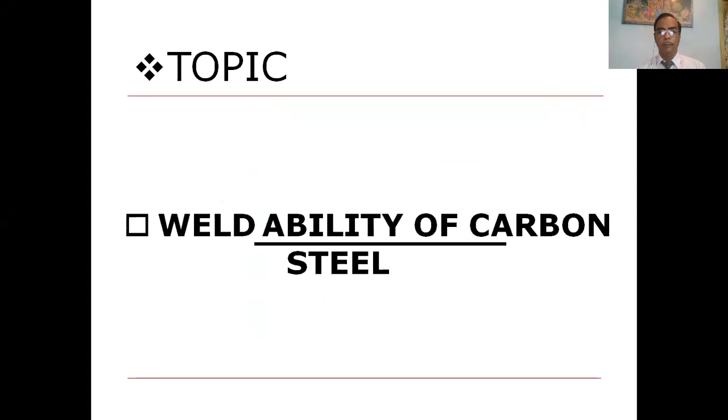The subject topic is Advanced Welding Technology, lecture number 24, Weldability of Carbon Steel. Today's topic is Weldability of Carbon Steel. Definition.

What is weldability? Two metallic parts of same or different metals mixed and fused when welded with or without applying pressure, with or without the use of filler metal, then the ease with which the metal joint will properly form by joining metal or metals is called weldability.

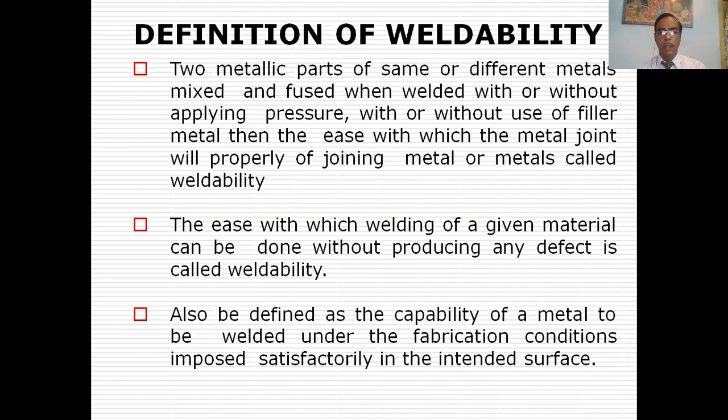The ease with which welding of a given material can be done without producing any defect is called weldability. It can also be defined as the capability of a metal to be welded under the fabrication conditions imposed, satisfactorily in the intended surface.

As per the American Welding Society, the definition of weldability is the capacity of a material to be welded under fabrication conditions imposed into a specific suitably designed structure and to perform satisfactorily in the intended service.

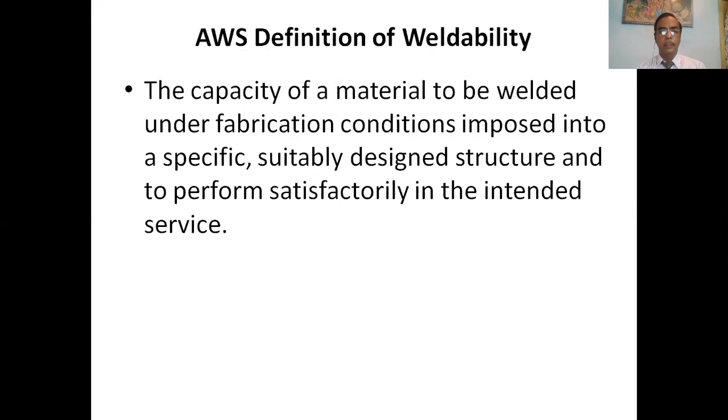This is the flux core arc welding, that is basically MIG welding. This is continuous welding being performed. Tubular electrode is there. This is a tubular electrode, and this is the electrode height, and this is arc being performed, arc and metal transfer, and this is weld puddle, and welding.

This is the welding metal, weld metal, and this is the direction, and this is the slag. Top of this slag, molten slag. This is a molten slag, and guide wire and contact tubes. This is the welding performance of a flux core arc welding.

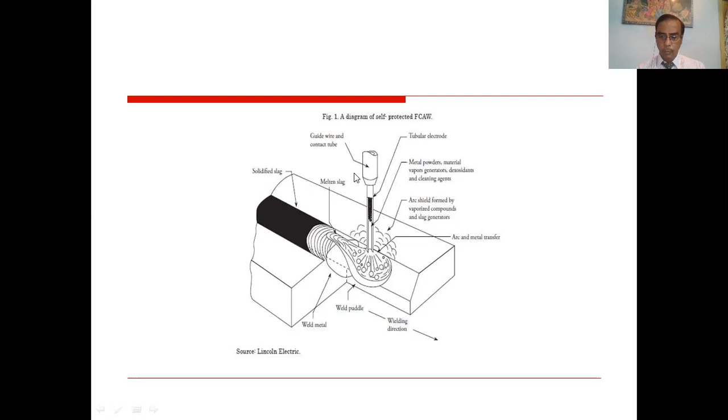The meaning of weldability: weldability is considered as the ease of accomplishing a satisfactory weld joint and can be determined from quality of the weld joint, effort and cost required for developing the weld joints. The efforts required for producing sound weld joints are determined by the properties of the metal system in consideration, namely melting point, thermal expansion, defects inherent in the base metal, and surface condition.

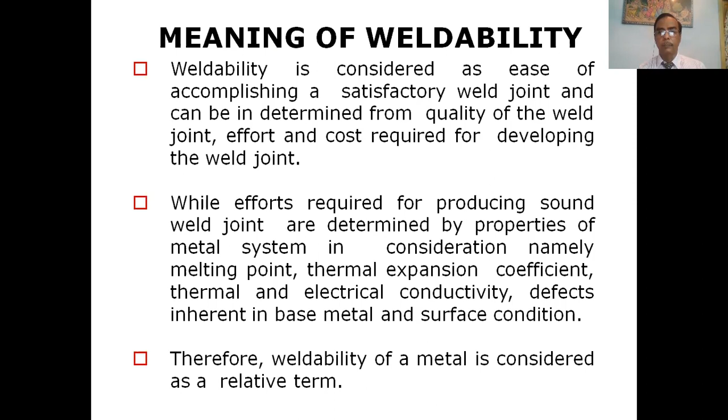Therefore, weldability of a metal is considered as a relative term. The metallic material with adequate weldability should fulfill requirements like contributing to good weld quality even with high dilution, having unchanged corrosion resistance after welding, and should not be embrittled when stress relieving.

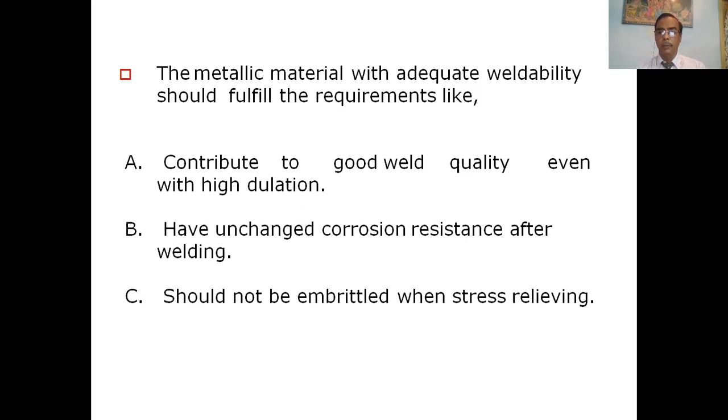This is the concept of weldability. Concept of weldability number one: metallurgical compatibility of a metal or alloy to be welded with any specific welding process. Metallurgical compatibility means that the base metal and weld metal can be combined with the degree of dilution encountered in a specific process without the production of deleterious constituents and phases.

Ability of the metal and alloy to be welded with mechanical soundness, and mechanical soundness must meet soundness requirements and normal engineering standards.

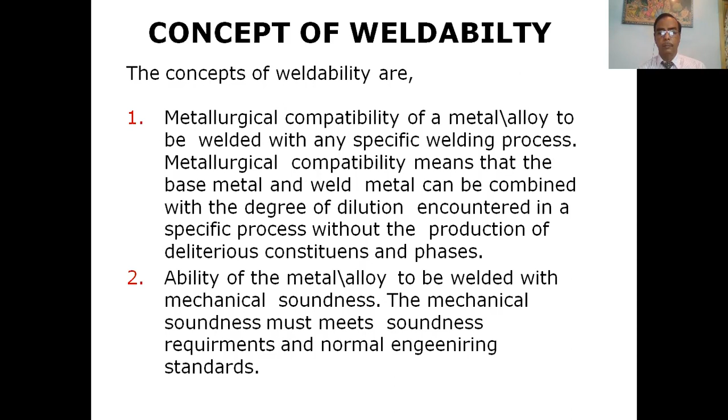Welding metallurgy and weldability: the topics of welding metallurgy and weldability are closely related to each other, since the weldability of the material is very much related to its microstructure. While the term welding metallurgy is universally accepted as a subset of physical metallurgy principles, the term weldability has been subject to a wide range of definitions and interpretation.

In its broadest context, weldability considers aspects of design, fabrication, fitness of service, and in some cases, repair.

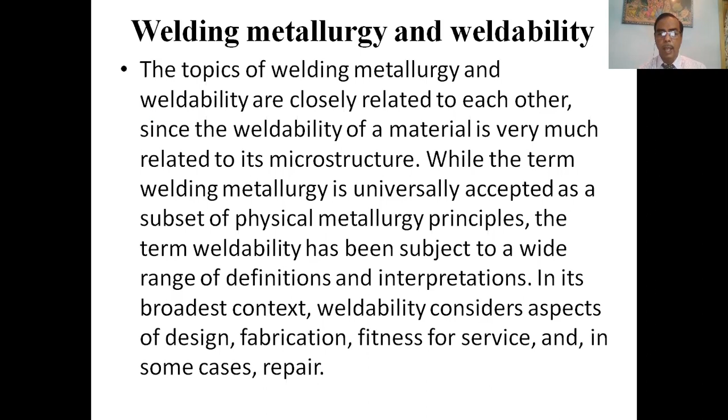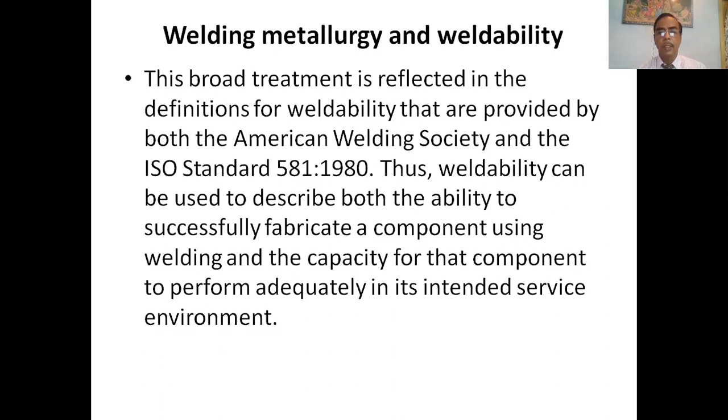Welding metallurgy and weldability: this broad treatment is reflected in the definitions for weldability provided by both the American Welding Society and the ISO standard 581 of 1980. Weldability can be used to describe both the ability to successfully fabricate a component using welding and the capacity for the component to perform adequately in its intended service environment.

The serviceability of the resulting welded joints may concern the ability of the welded structure and joint to work under low and high temperatures, impacts, etc.

This is SMAW, shielded metal arc welding electrode. This is covered flux, covered. This is the metal core, direction of travel, metal and transfer, metal and slag in transfer.

This is the arc, slag. This is slag. A is the slag layer. B is the weld buildup. And C is the weld depth of fusion. This depth is the weld depth, and weld metal. D is the weld metal.

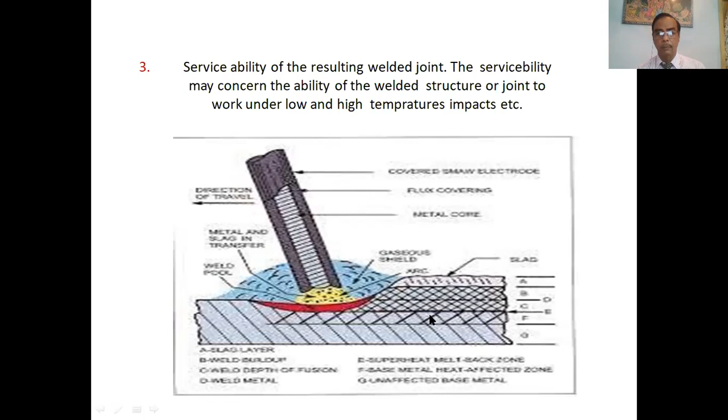Factors affecting weldability. Number one is the melting point of a metal. Materials with medium melting point can be welded very easily.

Thermal conductivity: material with high thermal conductivity K is treated as difficult to weld material. High conductivity.

Difficult to weld material. Reactivity: if the material reacts with the air, water, and surroundings, it becomes difficult to weld.

Coefficient of thermal expansion of metal. Materials with high thermal expansion coefficient become difficult to weld.

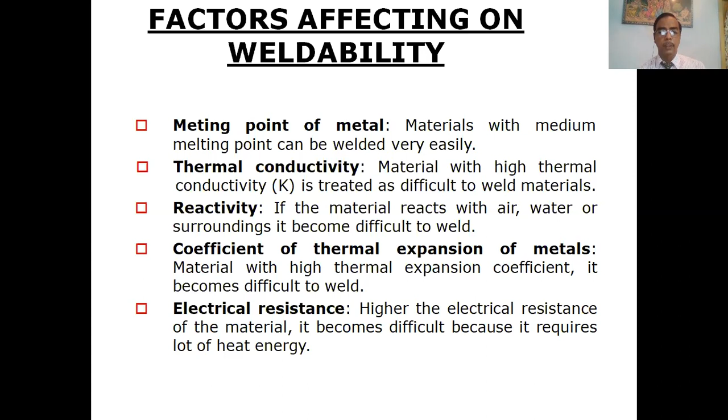Electrical resistance: the higher the electrical resistance of the material, the more difficult it becomes, because it requires a lot of heat energy. Surface condition: material with a dirty surface becomes difficult to weld. Strength and brittleness of metal at high pressure.

Composition of metal. Heat treatment carried out before and after welding. Thermal properties of the metals.

From the above mentioned factors, whichever material is influenced by the maximum number of factors is treated as very difficult to weld, and whichever material is influenced by the least number of factors is treated as a very easy to weld material.

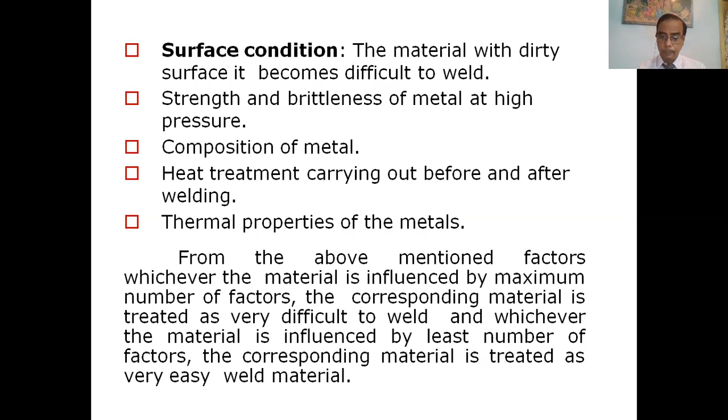Weldability of some metals in descending order is as under: number one is iron, which has very good weldability. Number two is steel.

Iron means pure iron, Fe, and steel means it's a composition of carbon and iron, and some trace elements of magnesium, sulfur, phosphorus, manganese, and silicon. Number three is cast iron, where the carbon percentage is more than 2%.

Number four is low alloy steel, and number five is stainless steel. Low alloy steel means it has 1 to 2% chromium and some nickel percentage. Stainless steel has chromium percentage more than 12% minimum.

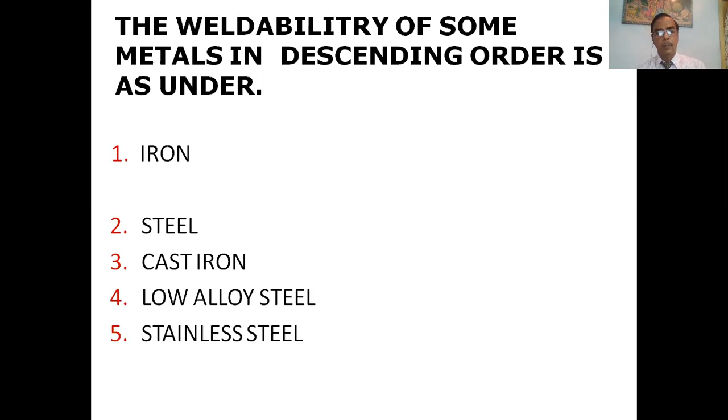Importance of weldability: as per the weldability of base metal and electrode metal, a mechanically sound weld without cracks is produced, to satisfy the needs of the design. Weldability is an important quality.

Fabrication work done using metals having good weldability gives strength of joint as per the design. If the weldability of the metal is good, then special types of welding processes are not required to weld the metal. The weld obtained by selecting a metal having good weldability does not produce brittle fracture.

Good weldability reduces the requirement of preheating.

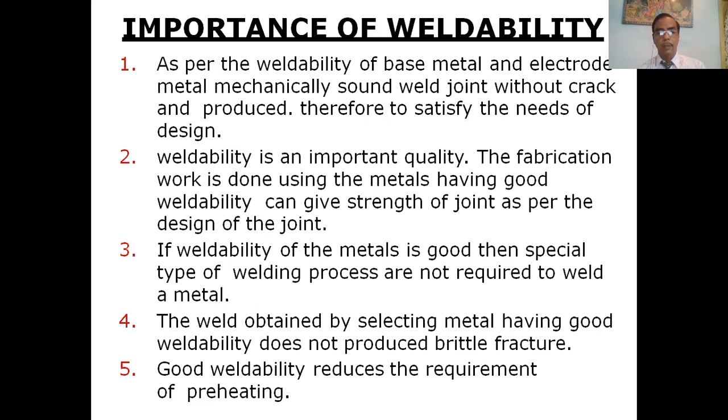Classification of steel: steels are classified into groups as follows. Plain carbon steel, that is low carbon steel, 0.01 to 0.3% carbon. Medium carbon steel, 0.3 to 0.6% carbon, and high carbon steel, 0.6 to 1.4% carbon.

Plain carbon steel contains only iron and carbon as main alloying elements. Traces of manganese, silicon, aluminum, sulfur, and phosphorus may also be present.

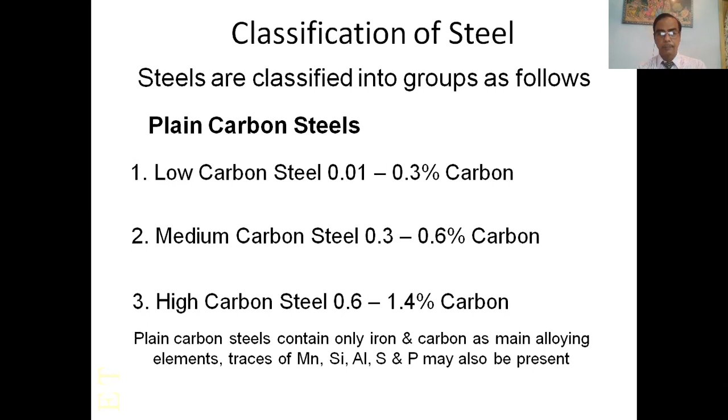An alloy steel is one that contains more than iron and carbon as main alloying elements. Alloy steels are divided into two groups: low alloy steel, with less than 7% extra alloying element, and high alloy steel, with greater than 7% extra alloying element.

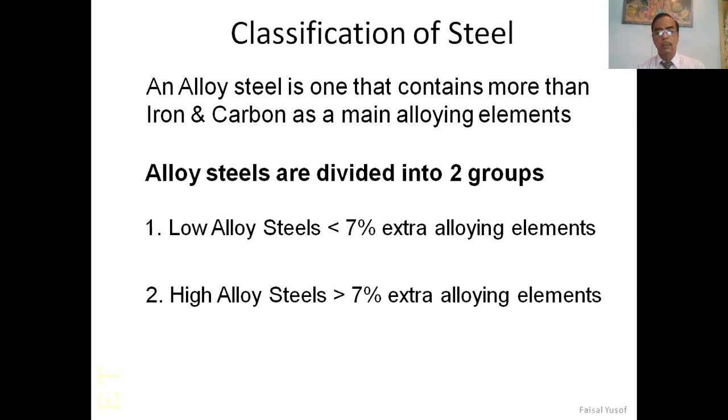So the extra alloying elements like chromium, nickel, and others - less than 7% is low alloy, and more than 7% means the alloying elements are higher than that.

This is the iron carbon diagram. In this diagram, this is the eutectoid point where A3 and ACM are connected, and this portion is ferrite.

This line is ferrite, ferrite plus cementite. As the carbon percentage increases, the Fe-carbide increases.

This is hypoeutectoid, and this is hypereutectoid. As carbon percentage increases beyond more than 1 or 2%, it becomes hypereutectoid, this is hypoeutectoid, and the 723 point is the eutectoid point.

And 885 is higher than that. Alpha and gamma - alpha is ferrite, and gamma is basically austenite. This portion gamma is plus Fe3C, which is carbide, also called cementite - iron cementite, and this is the portion.

This portion is liquid, and here is gamma plus L, liquid plus gamma meaning austenite. This is the iron carbon diagram.

What you have already learned in the metallurgy or materials subject, so for brush up, this is given again, so you can understand how welding is performed and the structure is changed.

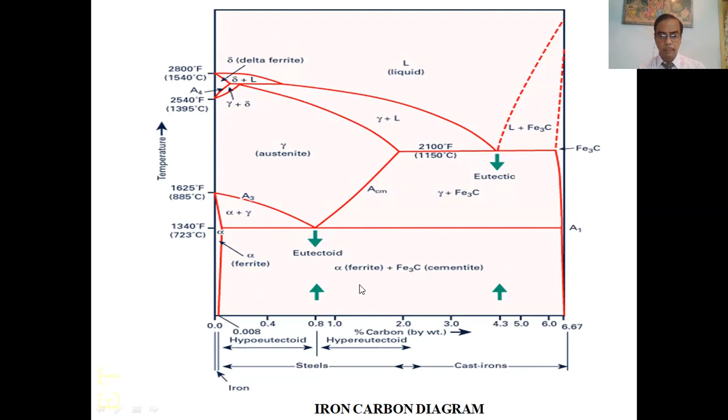There is a diagram showing the relationship between carbon content, mechanical properties, microstructure, and uses of plain carbon steels in the normalized condition.

This portion is pearlite. This is ferrite and pearlite. This is basically carbon content - 0.2, 0.4, 0.6, 0.8. And this portion is cementite.

As the carbon percent increases, elongation decreases but hardness increases. The tensile strength also increases up to a point of 0.8 or 0.9% carbon, after which it decreases to some extent.

This is the relationship between the carbon content, mechanical properties, microstructure, and use of plain carbon steel in the normalized condition.

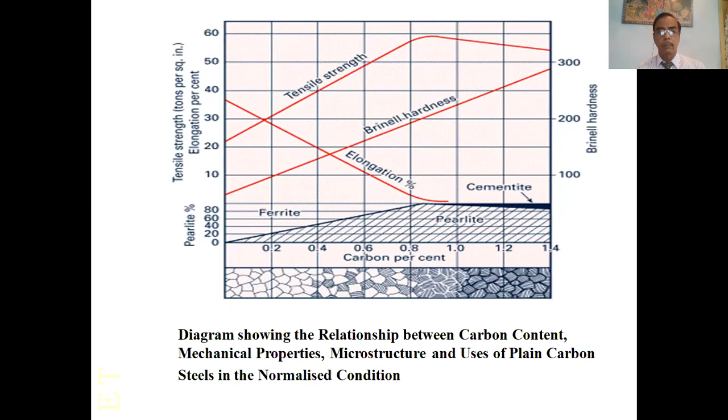Steel weld metallurgy: Carbon is the major element in steel, influencing strength, toughness, and ductility. Manganese is secondary only to carbon for strength, toughness, and ductility - it's a secondary deoxidizer and also acts as a desulfurizer. Silicon is a primary deoxidizer. Molybdenum affects hardenability and has high creep strength at high temperatures.

Steel containing molybdenum is less susceptible to temper brittleness than other alloy steels. Chromium is widely used in stainless steel for corrosion resistance, increases hardness and strength but reduces ductility. Nickel, used in stainless steel, provides high resistance to corrosion from acid and increases strength and toughness.

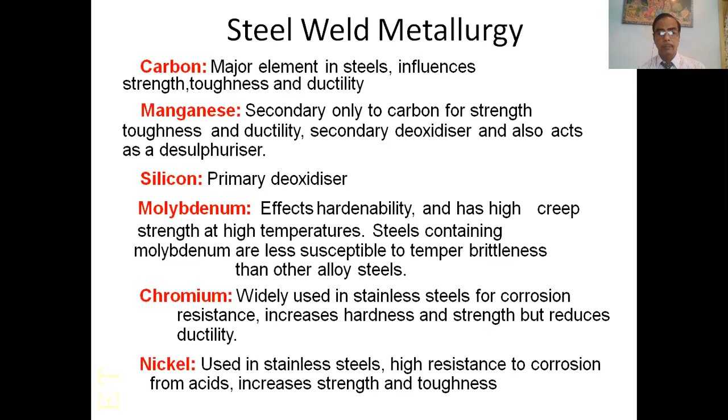Steel weld metallurgy: aluminum acts as a deoxidizer and grain refiner; sulfur affects machinability; tungsten provides high temperature strength; titanium eliminates carbide precipitation; vanadium gives fine grain toughness; and copper provides corrosion resistance and strength.

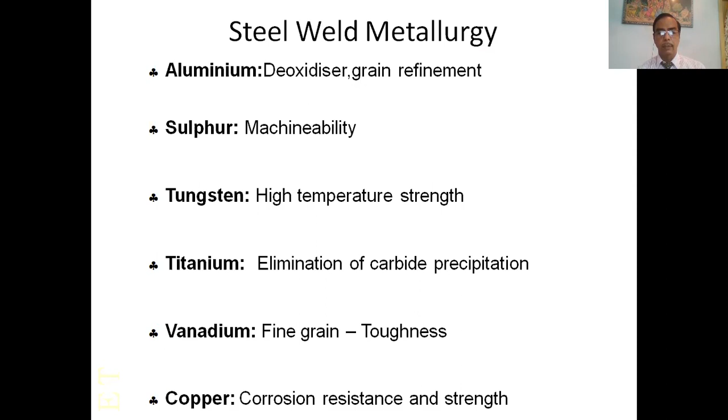Increased strength comes from carbon, silicon, copper, manganese, molybdenum, niobium and vanadium. Their exact effect depends on other factors such as rolling temperature and time, and the amount of carbon and nitrogen present.

Hardening capacity depends on carbon, manganese, molybdenum, chromium, nickel and copper. Toughness and grain refinement are achieved via the presence of niobium, vanadium, aluminum and titanium. Elevated temperature properties depend on chromium, molybdenum and vanadium.

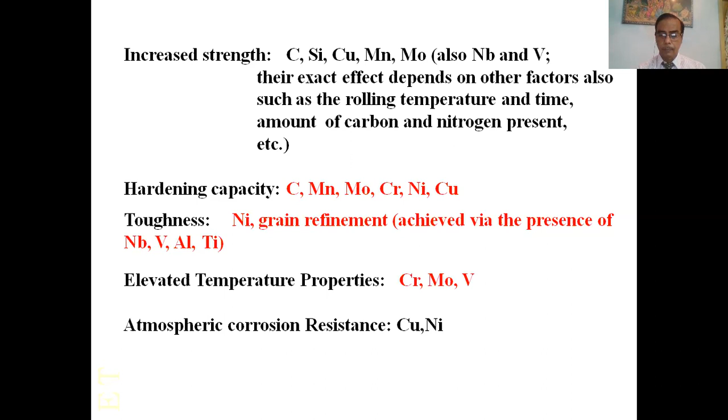Atmospheric corrosion resistance depends on copper and nickel. Steel weld metallurgy: the grain structure of steel influences its weldability, mechanical properties, and in-service performance. The grain structure present in a material is influenced by the type and number of elements present in the material.

It is also influenced by the temperature reached during welding and/or pre-weld heat treatment, the cooling rate after welding and/or pre-weld heat treatment, and post-weld heat treatment.

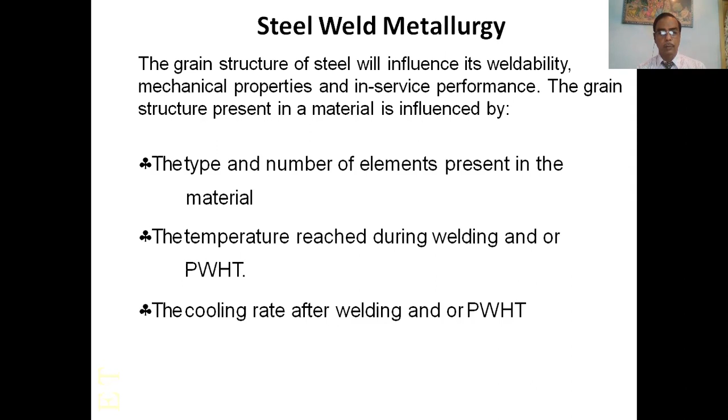Cooling rate of the weld zone depends on the following: weld heat, also called arc energy, which is the amount of electrical energy supplied to the welding arc over a given weld length in inches or millimeters, as well as thickness of material and preheating.

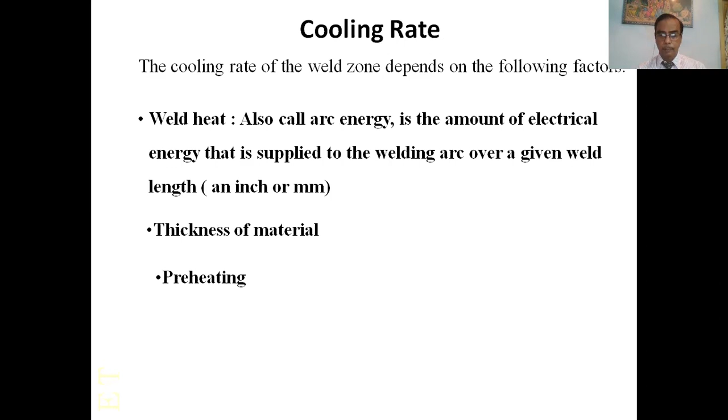Heat affected zone: the parent material undergoes microstructure change due to the influence of the welding process. This area, which lies between the fusion boundary and the unaffected parent metal, is called the heat affected zone.

This is very important in welding. A smaller heat affected zone means good weld performance, while a larger heat affected zone is detrimental to welding performance. However, the heat affected zone cannot be avoided in fusion welding.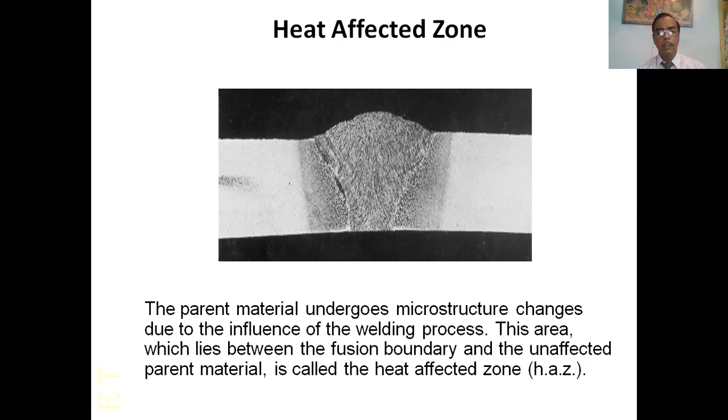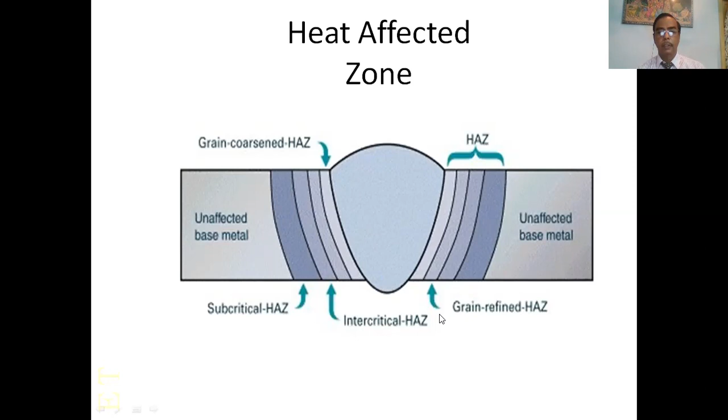Heat affected zone diagram: showing the unaffected material, subcritical HAZ, the rise portion, intercritical HAZ, grain refined HAZ, and grain coarsened HAZ. So the HAZ is divided into four zones: subcritical, intercritical, grain refined, and grain coarsened.

Heat affected zone: segregation and burning occur around 1500 degrees centigrade, coarse grain forms at somewhat less than that, around 800 degrees fine grain and intercritical forms, then tempering, then the parent material.

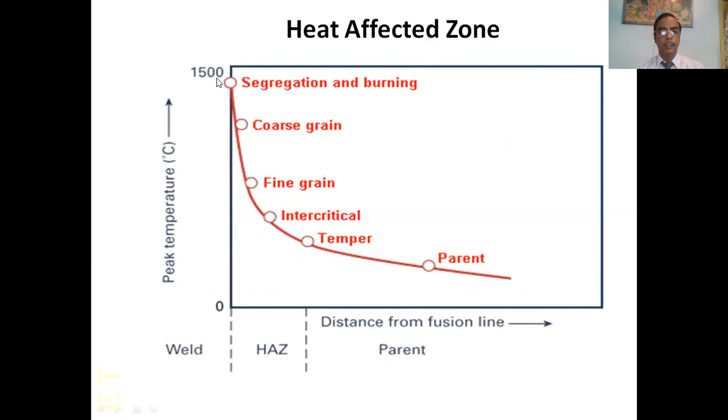This portion is called the HAZ, plotted against distance from the fusion line as the parameter, with peak temperature in degrees centigrade reaching 1500. This is the heat affected zone.

The extent of the heat affected zone depends on material composition and cooling rate: faster cooling gives higher hardness, and higher arc energy gives a wider HAZ. The HAZ cannot be eliminated in a fusion weld.

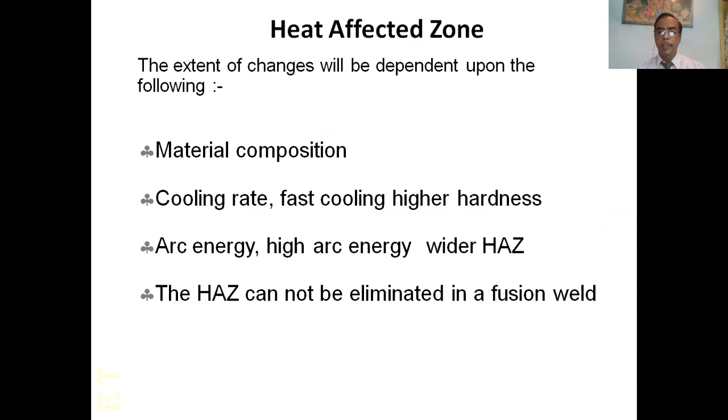Arc energy example: amperage is 200, voltage is 32, travel speed is 240 millimeters per minute. Arc energy equals amperage times voltage divided by travel speed in millimeters per second, times 1000. So heat input equals 200 times 32 times 60, divided by 240 times 1000, giving a heat input of 1.6 kilojoules per millimeter.

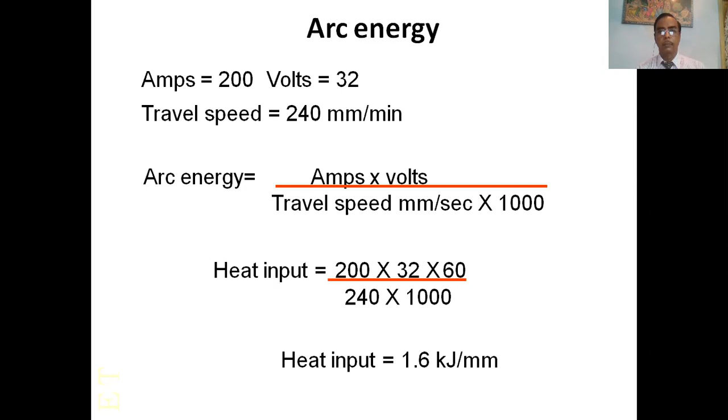High heat input results in slow cooling, low toughness, and reduction in strength. Low heat input results in fast cooling, increased hardness, hydrogen entrapment, and lack of fusion.

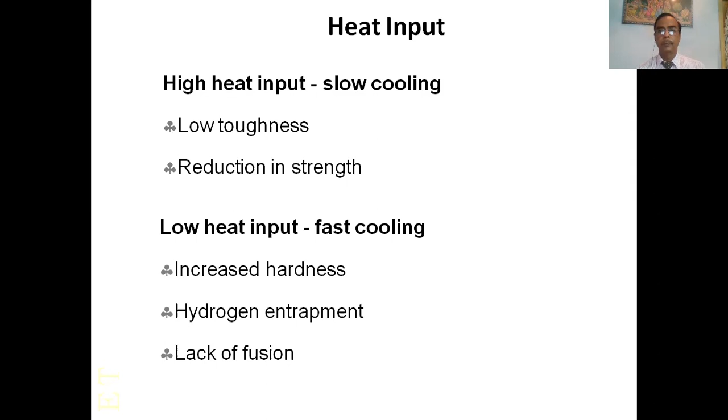Weldability can be defined as the ability of a material to be welded by most common welding processes and retain the properties for which it was designed. A steel that can be welded without any dangerous consequences is said to possess good weldability, while one that cannot is said to possess poor weldability, which normally results in cracking problems.

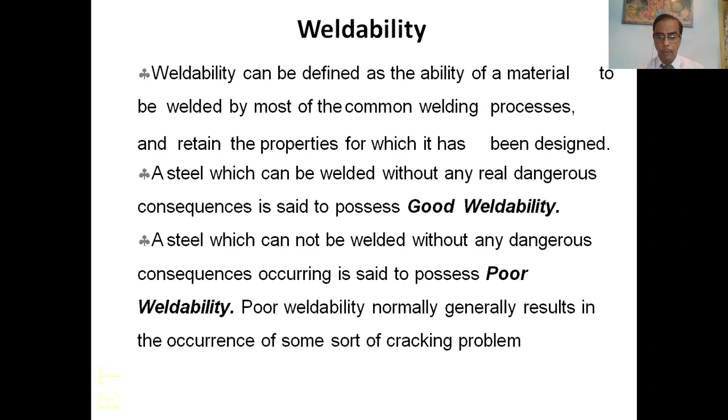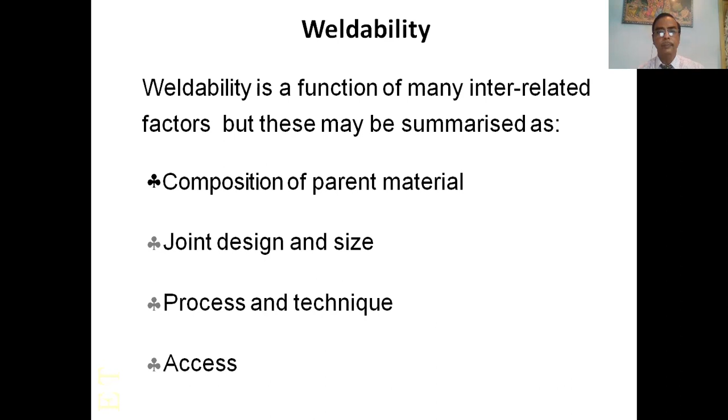Weldability is a function of many interrelated factors, summarized as composition of parent material, joint design and size, process and technique, and access. It is very difficult to assess weldability in absolute terms, so it is normally assessed in relative terms.

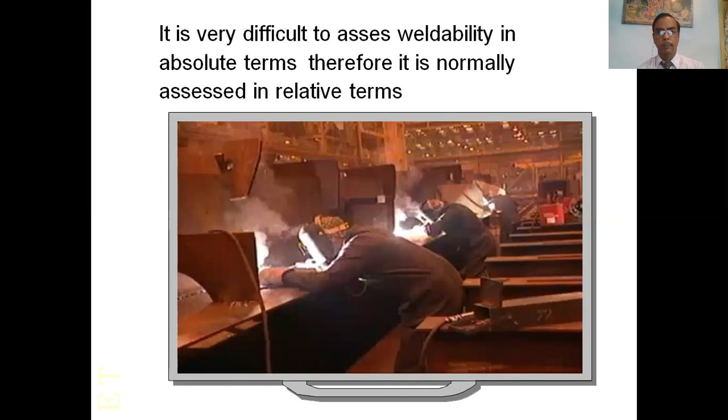Many factors affect weldability, since it is difficult to assess in absolute terms. These factors include material type and welding parameters such as amperage, voltage, travel speed, and heat input.

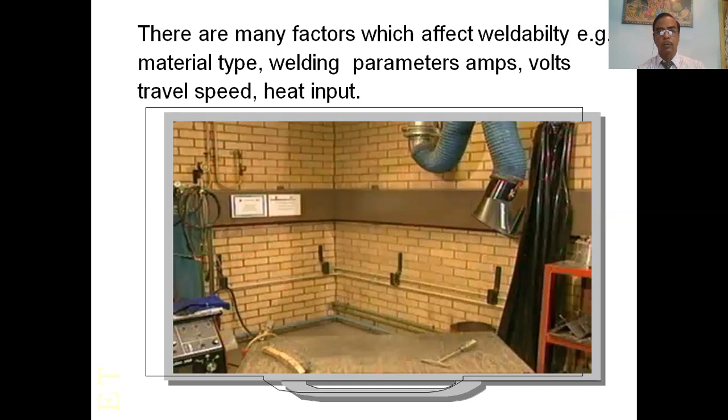Electrode parameters also factor in, including type of electrode and type of flux. These are also important for effective weldability.

Other factors affecting weldability are welding position and welding technique. Welding positions include horizontal, vertical, overhead, and others, along with how the welding techniques are performed.

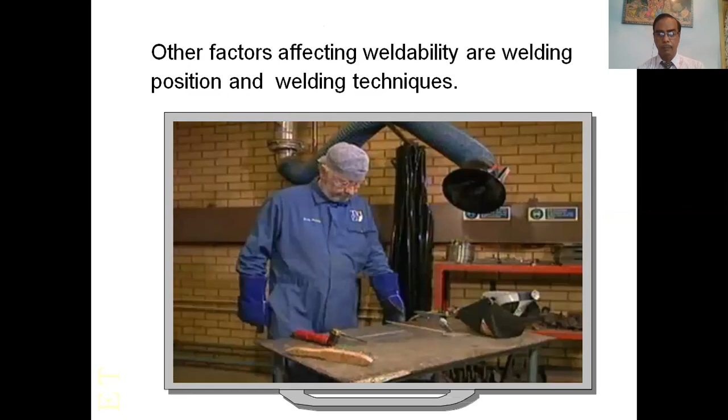Fatigue crack: fatigue cracking occurs under cyclic stress conditions. Fracture normally occurs at a change in section, at a notch, or at weld defects, which are areas of stress concentration.

All welded materials are susceptible to fatigue cracking. Fatigue cracking starts at a specific point, referred to as the initiation point. The fracture surface is smooth in appearance, sometimes displaying beach markings, and the final mode of failure may be brittle, ductile, or a combination of both.

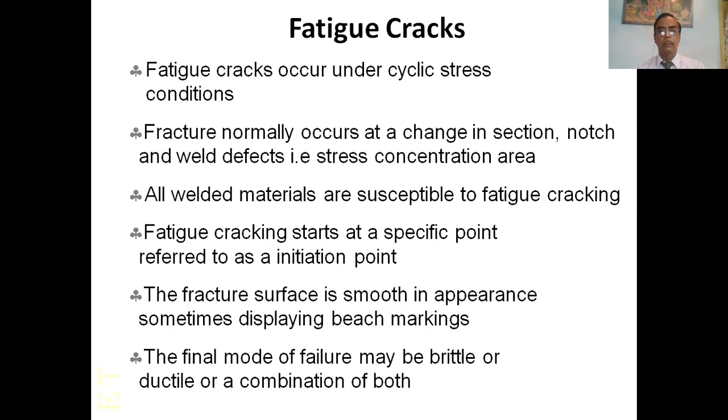Fatigue crack: an example of fatigue failure on a small bore pipe work.

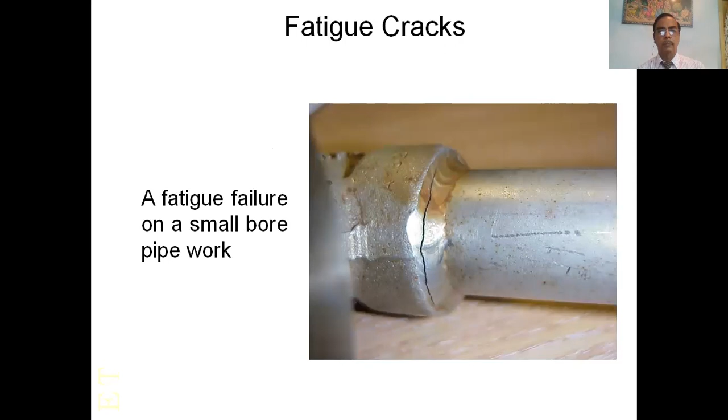Precautions against fatigue cracking include toe grinding, profile grinding, elimination of poor profiles, elimination of partial penetration welds and weld defects, operating conditions under the material's endurance limit, elimination of notch effects such as mechanical damage, cap or root undercut, and selection of the correct material for the service conditions of the component.

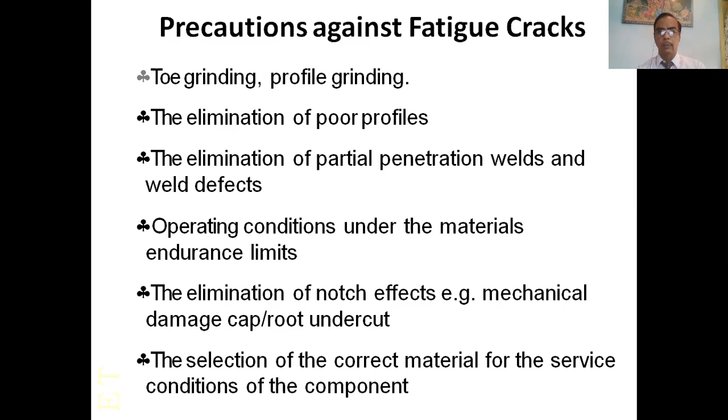So we have taken all these measures and discussed weldability and its assessment in relative terms. This is the end of this session. Thank you very much.